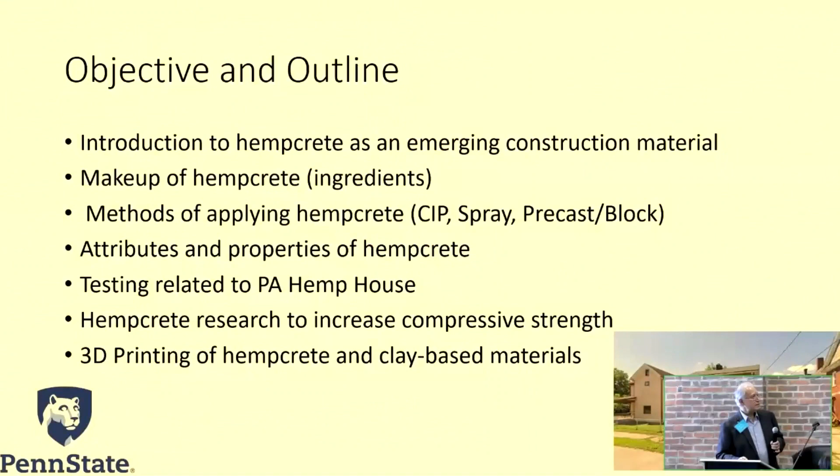So with that as the background, what are we going to discuss today? I should first apologize for some repetition because my colleagues already talked about the good stuff, so I'm going to skip through some of this quickly, since the presentation is for a crowd that my colleagues were not there for - so my stuff would be new, but they already talked about it.

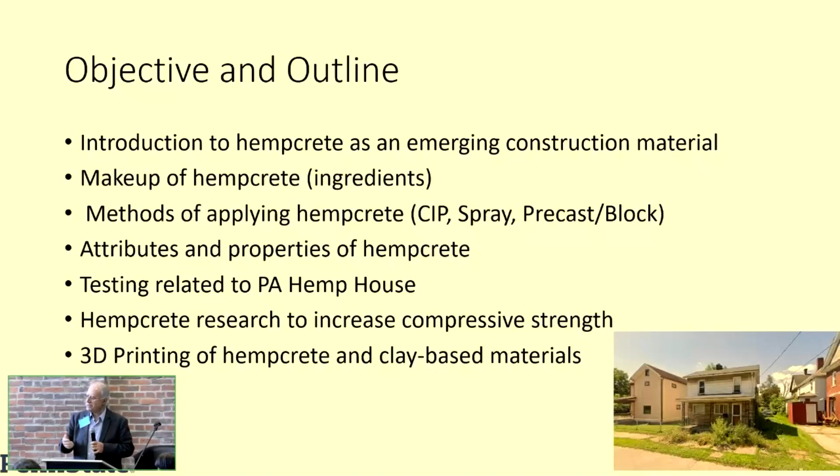Introducing hempcrete, what is the makeup, methods of applying hempcrete - they already talked about it, so I don't really have much to add. Attributes, some of the testing for the Pennsylvania Hemp House, hempcrete research to increase compressive strength, and then finding new areas - I'm trying to see, can we 3D print hempcrete? We've done some early study on that, and maybe combine it with other materials that probably my architect colleagues here would like to see.

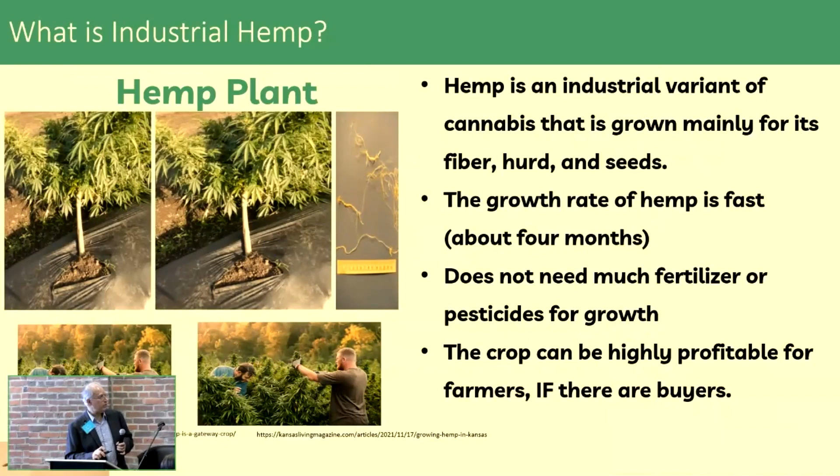So hemp, we've already talked about it, and I'm going to just skip through this since there's no need to repeat - you already have a lot of information today about growing hemp and what hemp is. The mixture, obviously, you have hemp hurd, maybe some fibers, lime, and water - that's your basic ingredients. Once you mix these and make your concrete, or hempcrete, or hemp lime, whatever they want to call it, it doesn't have much strength.

It's very, very weak - you can basically punch through it, your fist will go through it. But it has its own space, right? It's a good insulation. I'm trying to find what can make it a bit more stronger - what do we add? So that's the research. I have a student who's trying to figure out what ingredients, what additives can you add to make it stronger, get more PSI out of that.

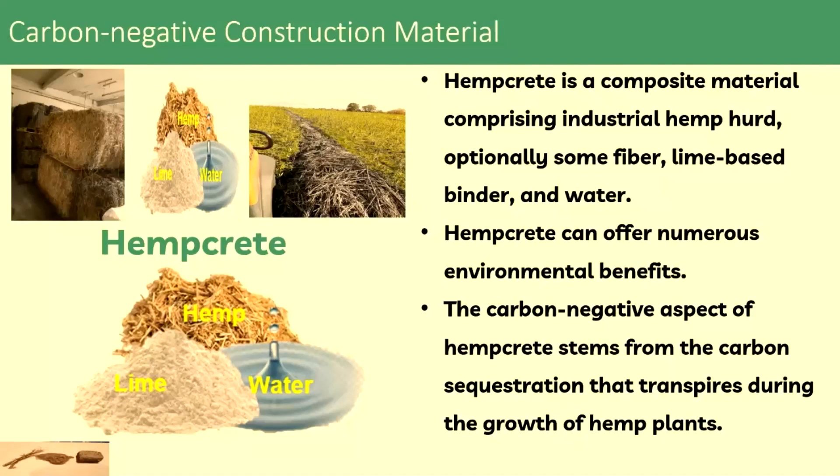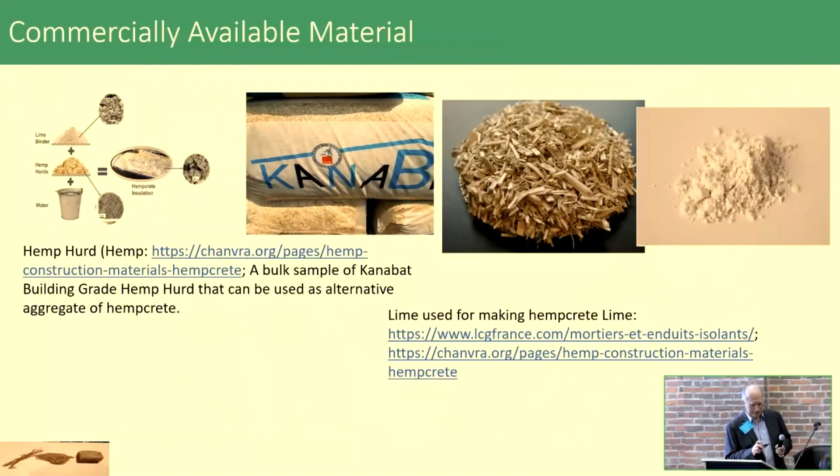So again, these are just the basic ingredients, and Cam has already shown you the French product - this is again Cam's operation. I apologize, it's repetitive, but you've already seen these.

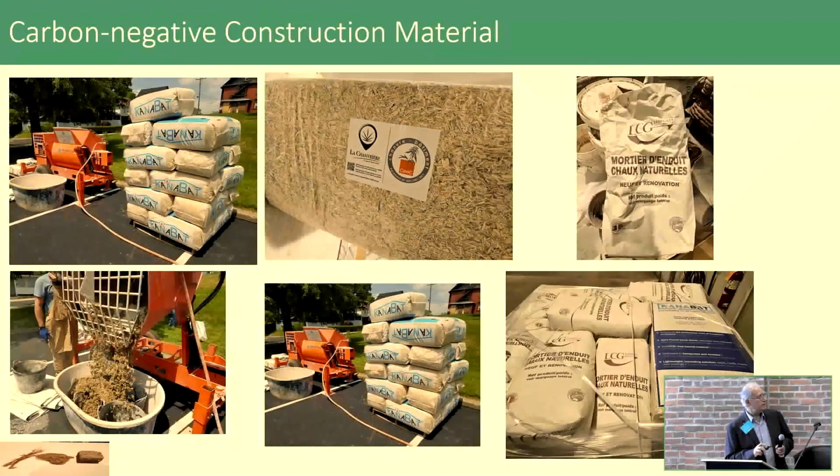So again, the 3 basic ways of building homes constructing with hempcrete: casting in place - you've got to have a little form, as Cam mentioned, and then you kind of tamp it, and then of course you move the forms up. You can have blocks, and of course the spray.

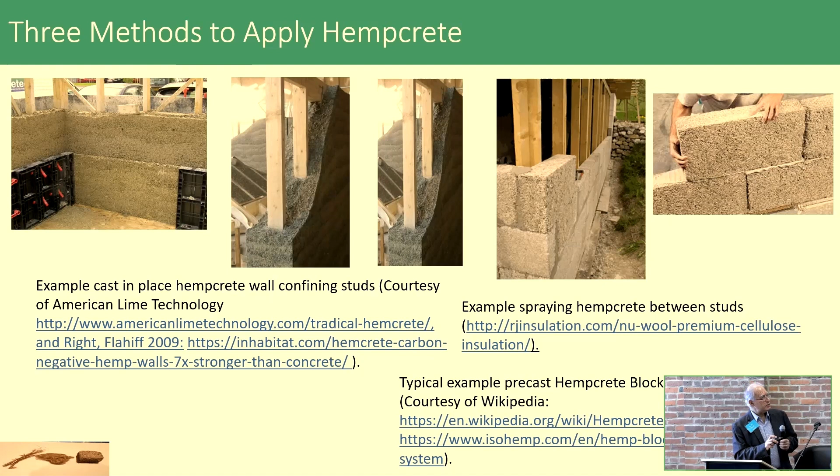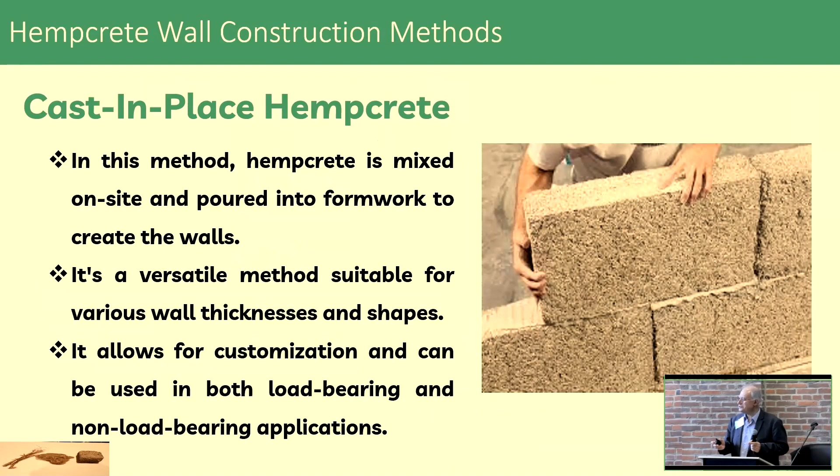So these are the attributes of how you actually build, just like regular block, but the masons in that case are not going to get backache - this stuff is pretty light. We have one sample over there, make sure you lift it and see how light it is. Spraying hempcrete, again, that's Cam's basically favorite approach of putting the wall up there like that.

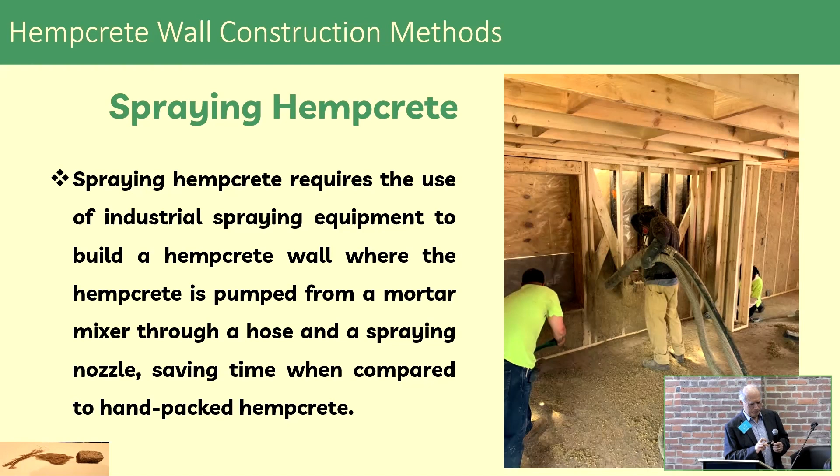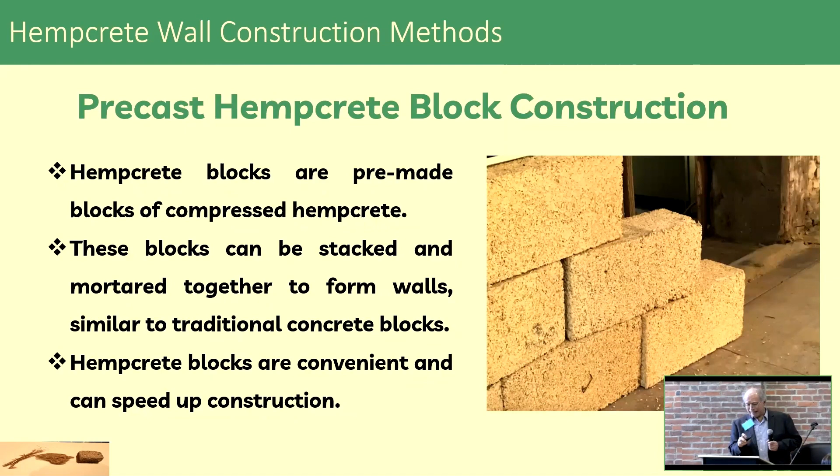And of course, precasting blocks. And then the next level, as Cam mentioned, is panels in his warehouse. So panelizing probably would be a better idea. One of the advantages of panelizing, again from our experience with the hemp house, is that it took so long to dry.

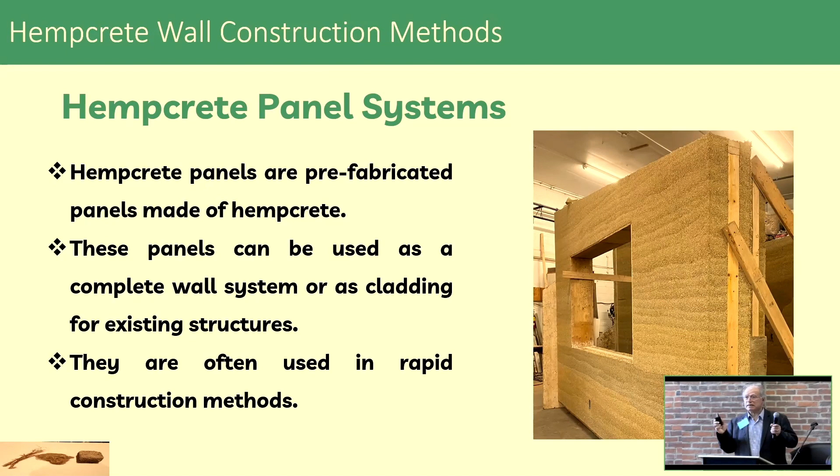So you can't put the finished coat on yet. That was the deterrent. The other thing is that it's a mess on the ground floor, and you have to spend a lot of time cleaning up. But with panels, this is clean, this is nice. You can control that, add whatever you want. This doesn't need any air barrier, but you can finish that as well. You can put the siding on the other side, finish the interior, and just send a complete package to the job site. This way you save a lot of the labor.

And then composite materials, maybe adding clay, straw, like an adobe, maybe combined with Hempcrete. We're investigating that for 3D printing. I'll show you in some slides toward the end.

So there are ideas that especially architects and designers can come up with. And if you think this has to be tested before you actually build something, that's where we come in. That's how I'm working with these guys.

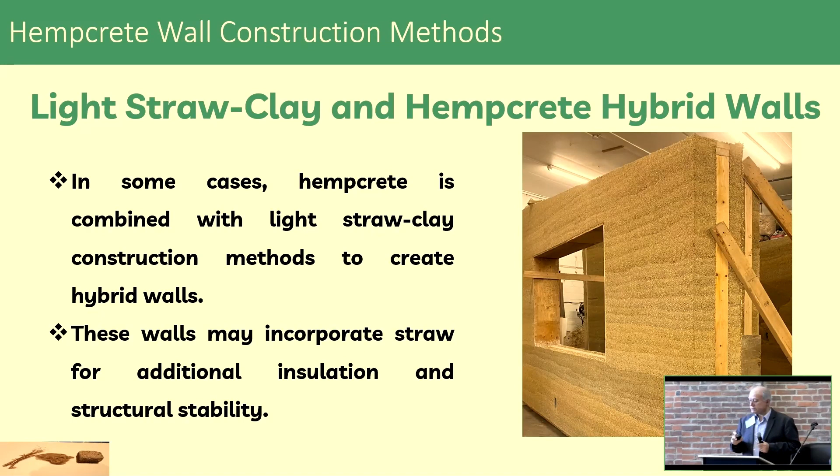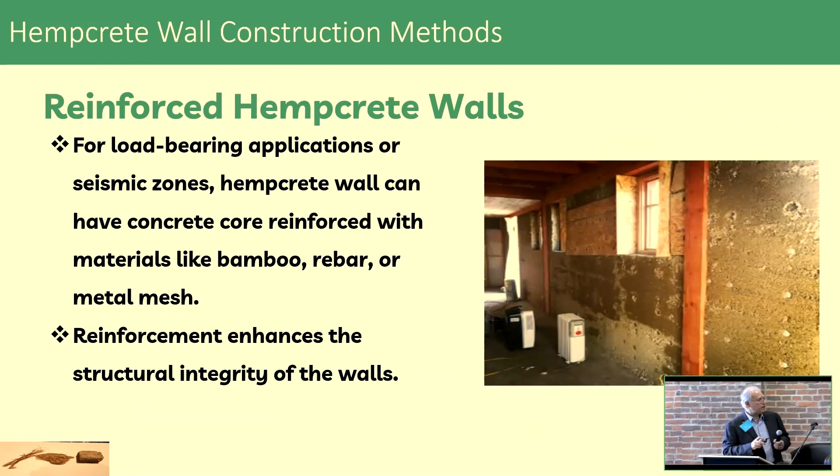And then what about reinforcement? Can we reinforce these walls? Different ideas, different mesh can be used. I had another slide but I think I'm missing it. Anyways, these graphics show you some comparisons.

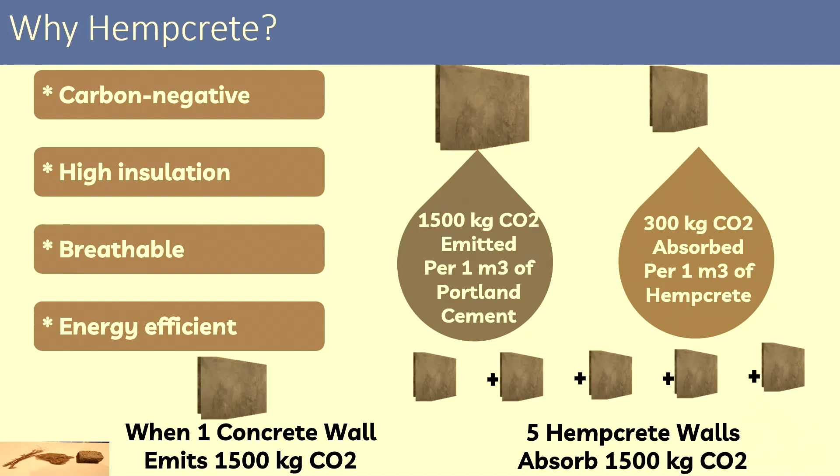Let's say you build a concrete wall, one concrete wall. One cubic meter of that concrete wall emits 1,500 kilograms of CO2. You get 5 of these walls made of hempcrete, and they actually absorb 1,500 kilograms of CO2. So that's how we can compare them as far as sustainability is concerned.

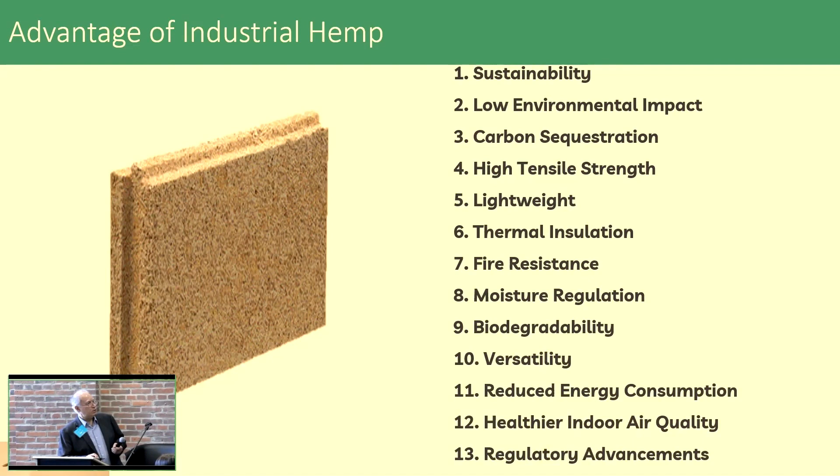But then there are a lot of other advantages with hempcrete, and there are numbers one can assign, but I didn't want to get into a lot of numbers here. For all of these, there are tests and studies that have been done. We're publishing papers assigning values to sustainability, low environmental impact, carbon sequestration, high tensile strength, lightweight,

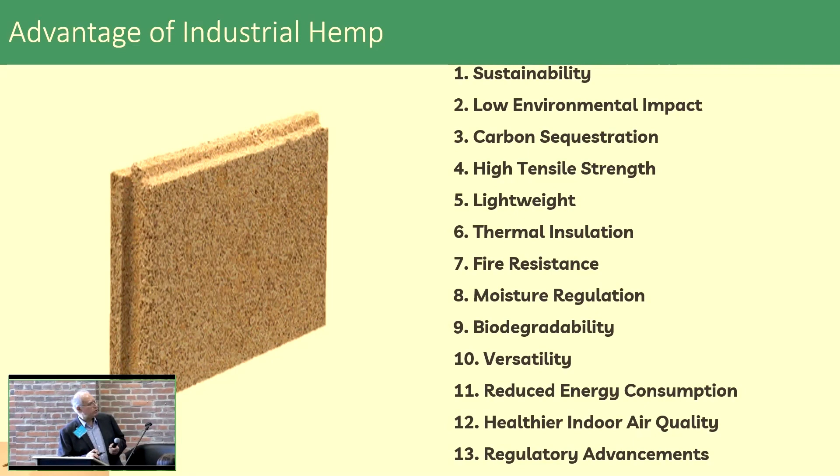thermal insulation, fire resistance - Cam mentioned fire resistance. I think I have one picture of what he was talking about. This basically shows that you can hold a flame on this material and it's not going to burn because of the lime.

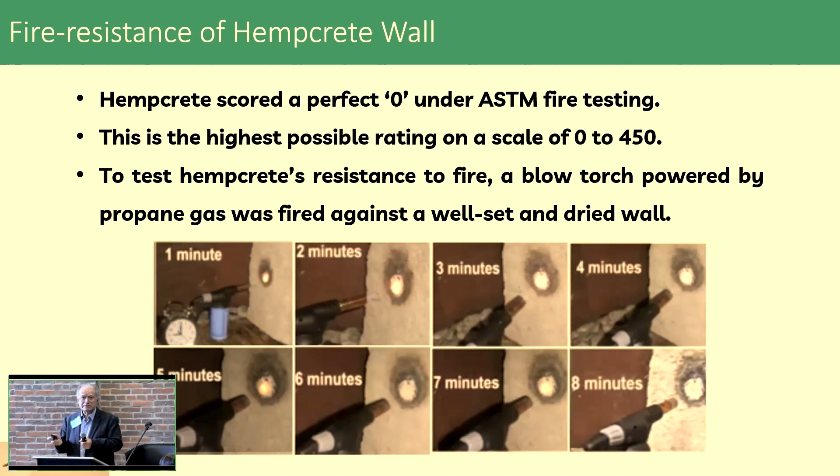So there's a lot of good properties this material has, but it needs to be developed further. Architects especially need to start using that, like a showcase, maybe demo houses. I think that's the key. If you have demo houses in different parts and bring clients - maybe you talk about Toll Brothers - if you build one demo house and bring Toll Brothers, they say, well, we like that idea. Then the makeup can be different. Again, that's part of the architect's design, or however you want to design the detail, that's fine.

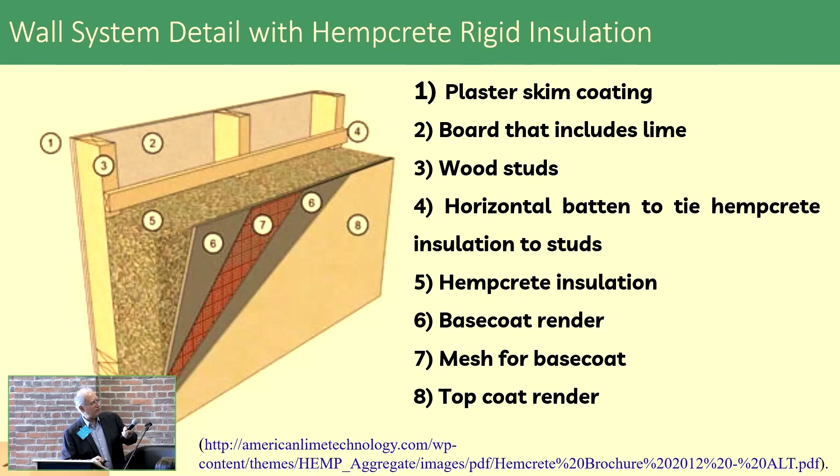At this stage, you're just saying it's like a rigid insulation on the interior side, between the siding and your studs, but you can have it between studs as we saw in the other pictures.

And just a few slides on the Pennsylvania Hemp House. Again, I had the pleasure of working with this team here. It's a magnificent team, very unique, very talented. They did the design, they did the construction. Our job was to study and measure.

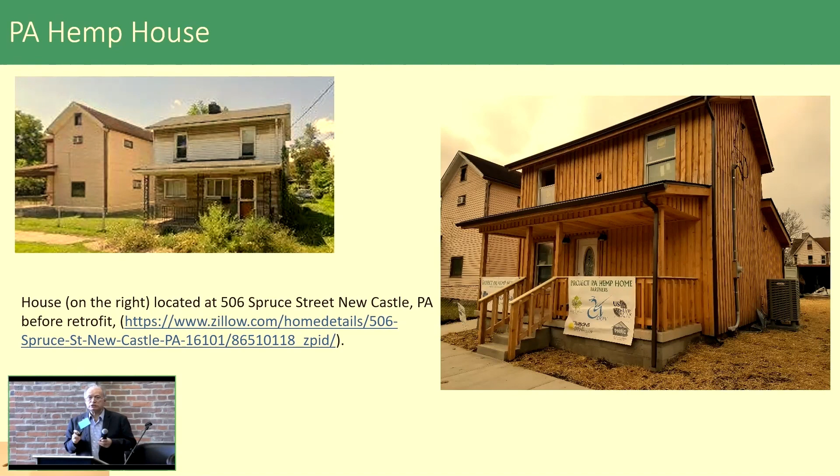And there was some interest about the question of the R factor - what is the R value for this? If you have an R value for, let's say, an inch of hempcrete, when you actually build that you can't say, well, I have 10 inches, so my R value is 10 times what I have for 1 inch, because you have siding, interior, exterior. So the best way would be to actually measure - once you're finished with construction, instrument it and measure the actual R value. That's what we did in our study. These are just different details that our architect colleagues developed for this.

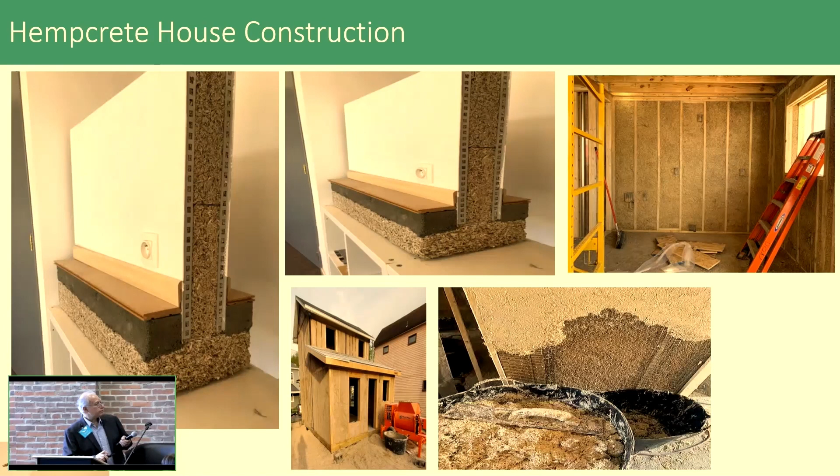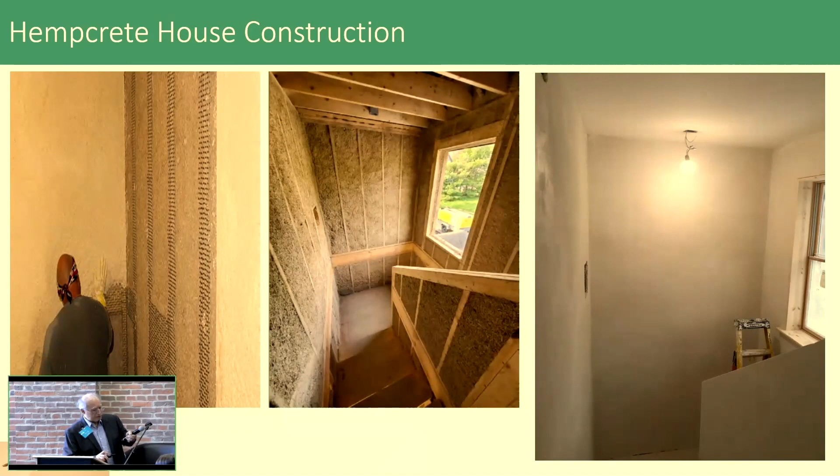So for this wall of the house, we came up with R17. Now if you start doing calculations, you can get something close to that. We have models we can calculate per inch, and then you have the air gap, the siding, the coat finish. But at the end of the day, can you prove that? We say, okay, this is the proof. We can set up instruments and basically get the reading from them.

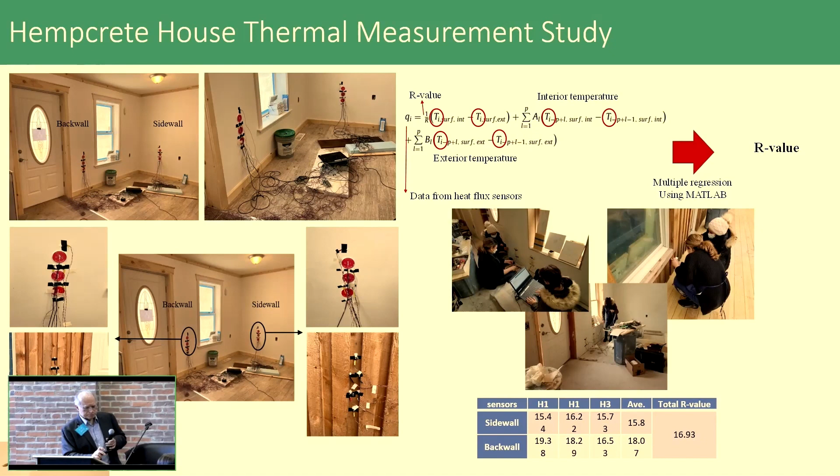So for this wall, which consists of 3/4 of an inch of rich plaster, like a double lime, on the interior, 10 inches of Hempcrete, 1/2 inch of airspace, and 1/2 inch of siding, that gives us an R value of 17.

Now, this is what it was created as. If you want to have a passive house and need much more than that, Cam has to thicken that wall, maybe go 12 inches of Hempcrete, then we reach whatever you need. And if you want it for the roof, that's fine too. Above the ceiling, instead of spray foam, you can have this Hempcrete.

So there are possibilities. The other part of our study was energy efficiency. We used BEopt, most of you are familiar with this program. We did a study and determined a 75% reduction in total energy usage between pre-retrofit and post-retrofit, meaning the initial house versus after it was retrofitted. That's a lot of energy savings.

Cam has already talked about the properties, the humidity, because this material can actually absorb humidity and release it. It's nice because the relative humidity was always less than 60%. You don't want the house to be too humid, it just absorbs it. So when you go to the house, maybe Lori can arrange for some visitors to go in.

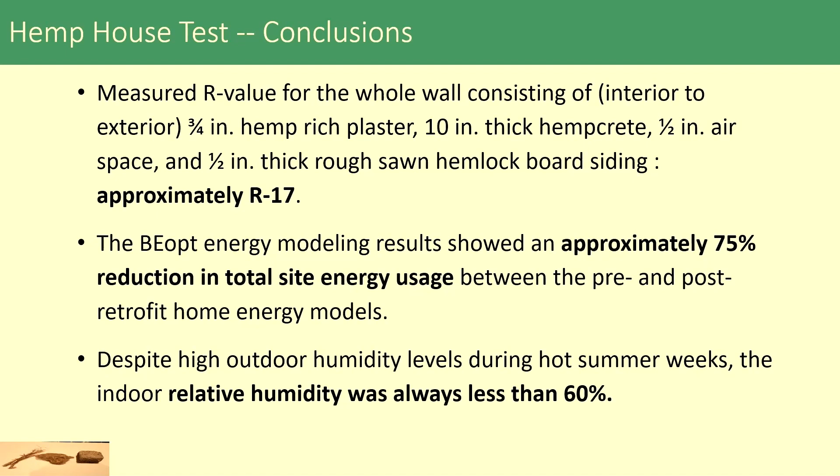So with that, I want to switch to the research side, because that's where I work with grad students. If they want to do a thesis, it's not what we just talked about, because that's Drew and Cam doing the job. But what about research? Well, research is, okay, you want to increase the compressive strength—we have to just do trial and error, because there's no formula.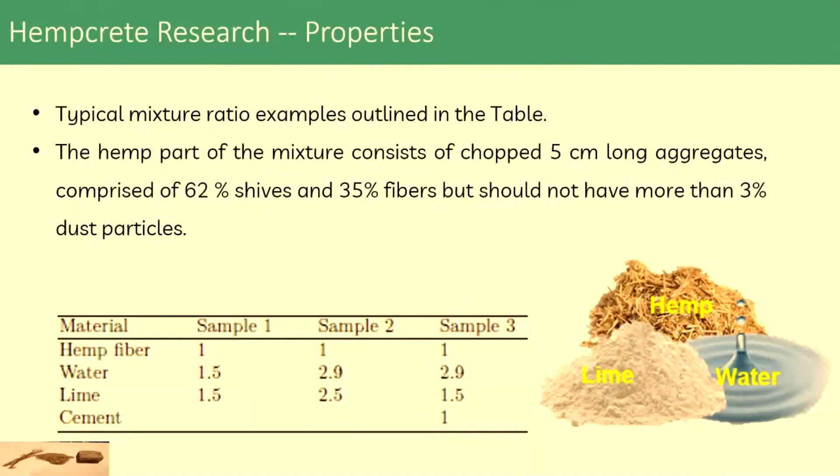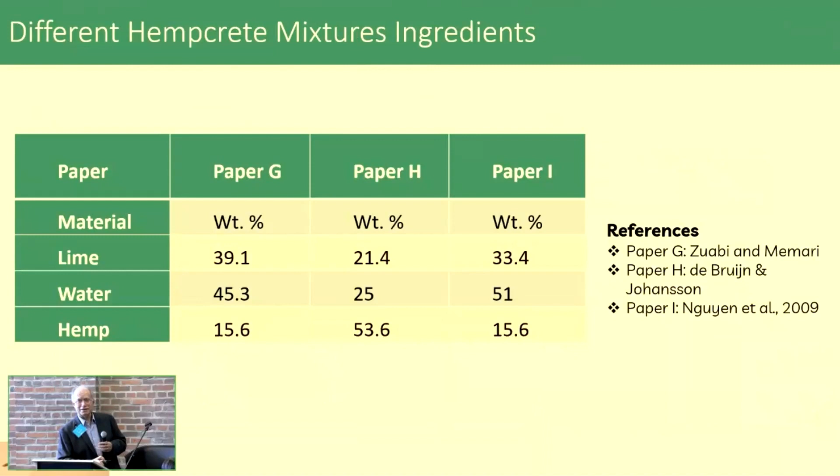We have to try different things, different additives, and just test and test and test until we find something that actually improves it. That's what defines research for a graduate student. We let them loose in the lab. I tell them, okay, you've got a lot of variables, work with them, come back and let's meet and see what we get. So we just do trial and error, different materials, different percentages, and test them to see what strength we get.

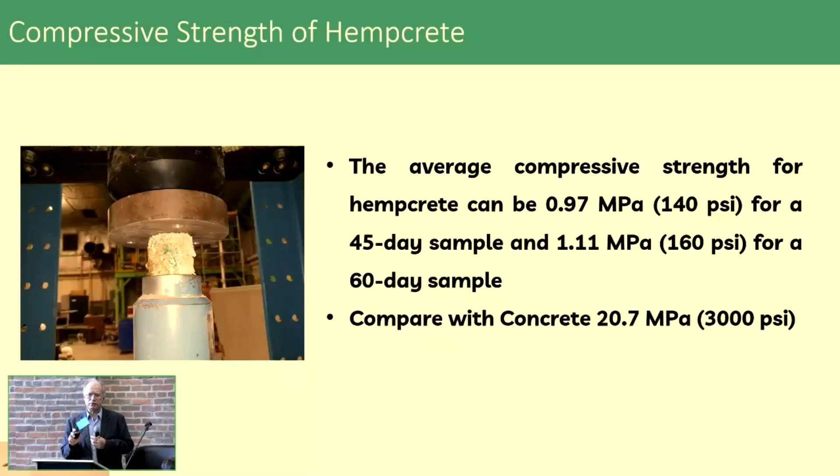But unfortunately, currently we don't have much, like 140 to 160 psi compressive strength. That's just nothing, so that's why we're not relying on this for load bearing. But Drew has a great interest in making his blocks stronger, so we're working together to identify, find maybe a secret recipe, some additives. I have a graduate student working on this specific question of what additives we can add to make this much stronger. I don't have results to share with you yet, but we're working on that.

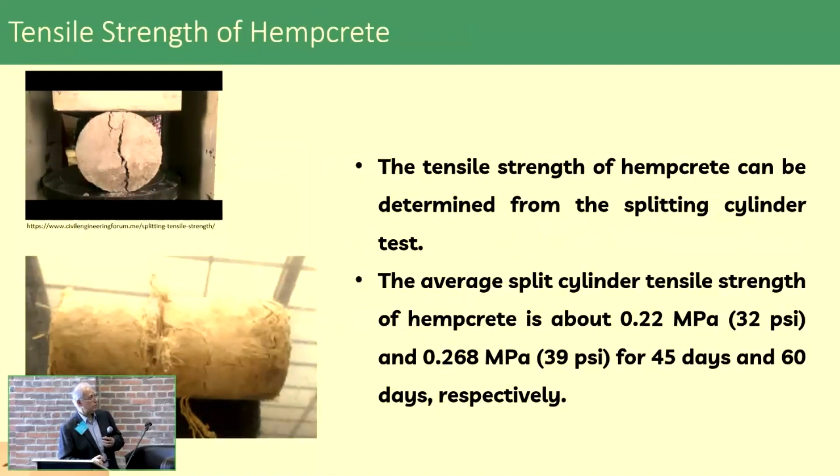Tensile strength of this, again, we go in the lab and it's very, very small, 32 psi. It's extremely small tensile strength, but that's what it is for now. And then super plasticizers, other additives—again, these are the favorite kind of task for a grad student, to go in the lab and change the percentages. There's nothing out there we can say, oh, that one actually works. We have to come up with that, and that defines the research.

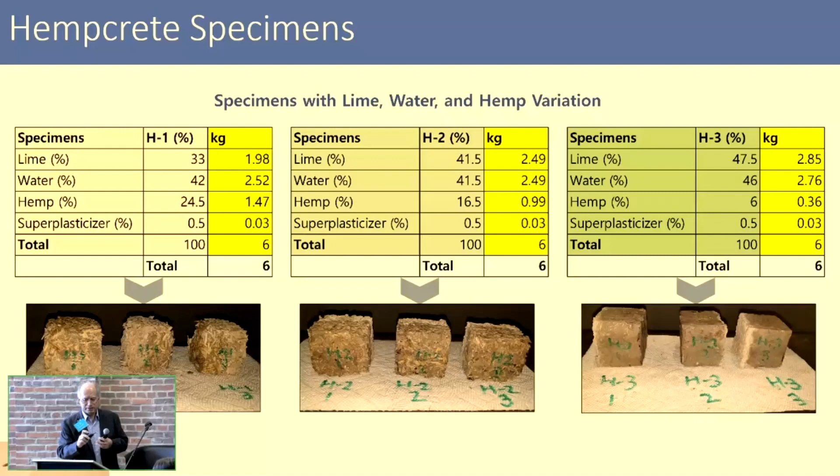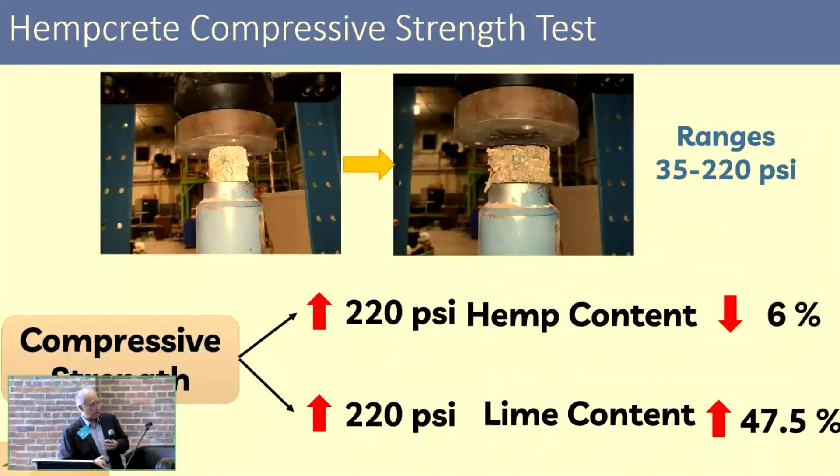Again, do testing further, and just identify what happens if you increase an ingredient or decrease an ingredient. Come up with some results that will show us the next step. So step by step, we kind of find the direction that improves the results.

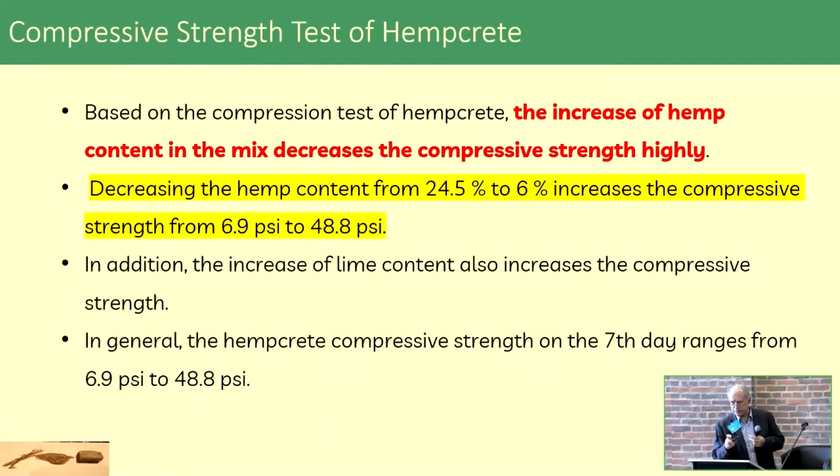At the end, increasing the hemp content is going to decrease the compressive strength, but increasing the binder is going to increase the compressive strength. There are different ways, and as I said, I don't have results to share because it's ongoing research at this time, but we have come up with some ingredients that definitely increase the compressive strength.

Now, moving further away from just basic research of strength, we want to see what other ideas we can use, like clay and hemp. What about Adobe? We use straw and clay, right? What about, instead of straw, using hemp and clay, and coming up with a new kind of Adobe?

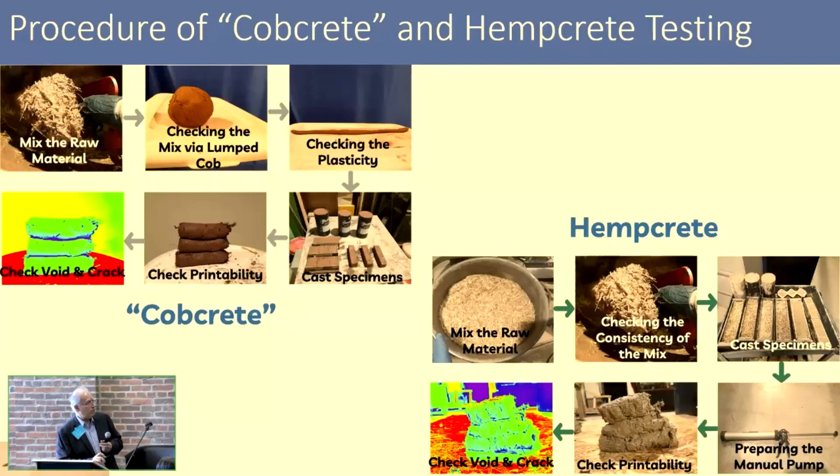So we've been testing that, and also exploring the possibility of 3D printing the clay mixture. We tried to 3D print Hempcrete. It was not successful, it was difficult. It would just get stuck in the hose, and the pump had difficulty giving us good results. But nonetheless, we're kind of exploring.

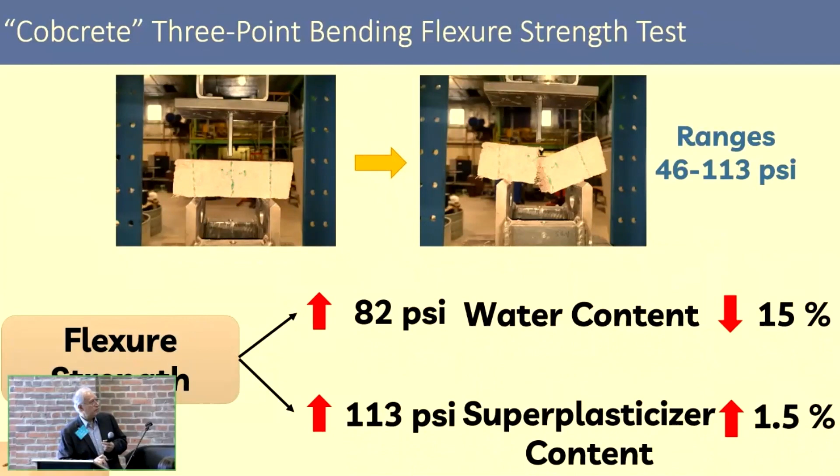We're testing. I have a PhD student, she's actually doing this work, getting basic information about the properties of the materials. But then there are architects who love to explore natural, sustainable materials like this.

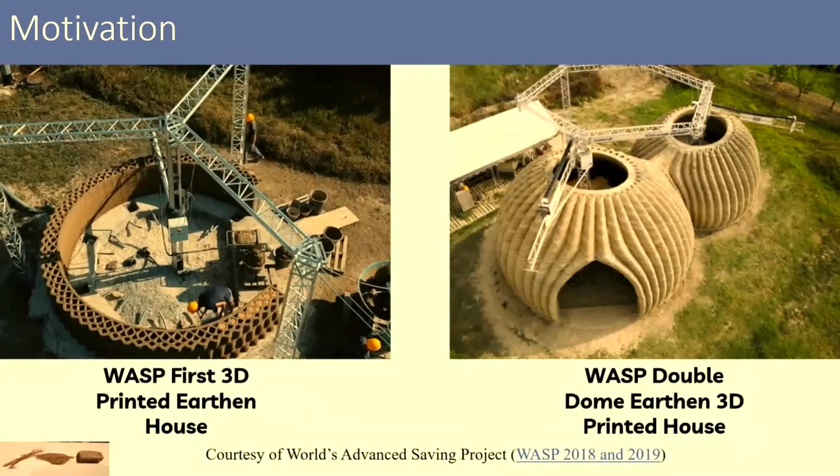Wasp is an Italian company that is promoting building with clay and straw and rice husk for insulation. And so we got some ideas from this company, and then my student is trying to work toward that goal.

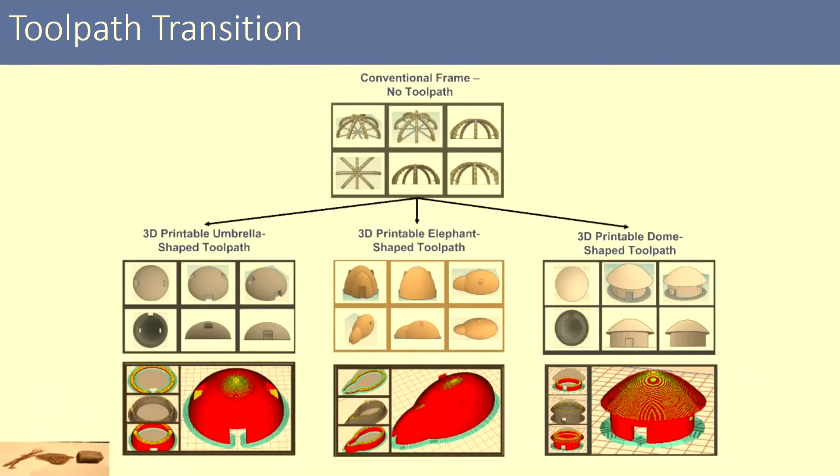And we're thinking about this thing with 3D printing: one of the advantages is that you don't have to have straight walls, you can have curves. This particular student is from Africa, and she has this heritage of this sort of rounded homes.

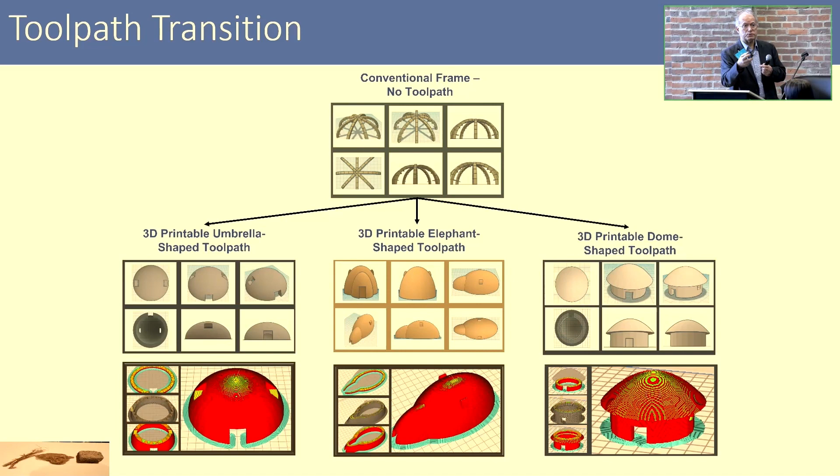And so we got these ideas that, well, if this is the traditional home, we can actually 3D print these things. And because we saw that Wasp is doing that, we could do that as well. So that was part of the motivation.

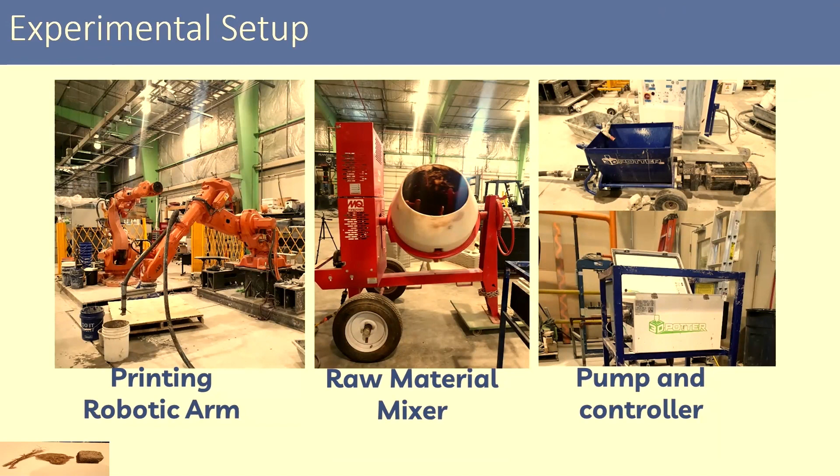This is our laboratory for 3D printing. You have the robotic arm, you have the mixer, you have the pump on the right side, and we developed a toolpath design that controls the movement of the robot.

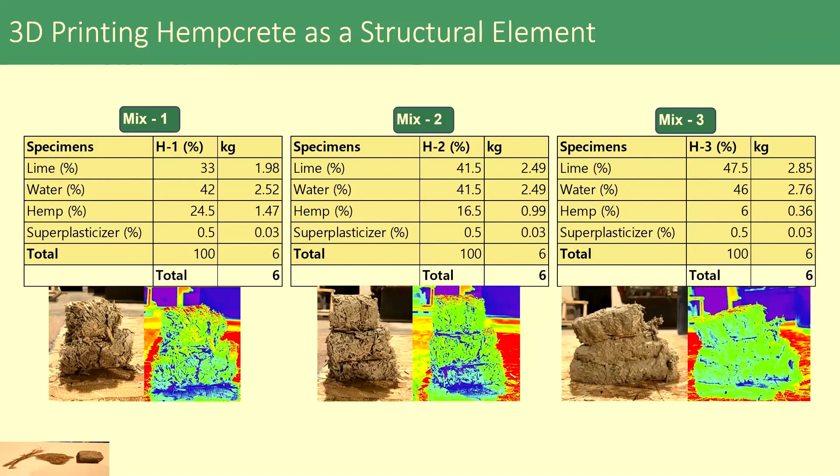So we said, okay, we go to plan B. Plan B is we're going to 3D print the clay mixed with hemp, but then fill all of those cells with Hempcrete. Now that becomes a good idea, because now you've got the insulation built in, and you've got the ability to actually 3D print.

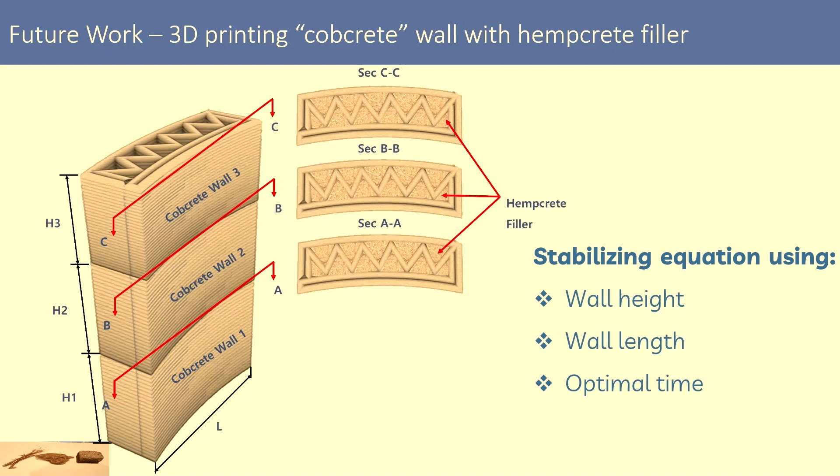So this was the final result of that approach. Here you see a 3D printed mixture of clay and hemp, and of course the cells will be filled with Hempcrete.

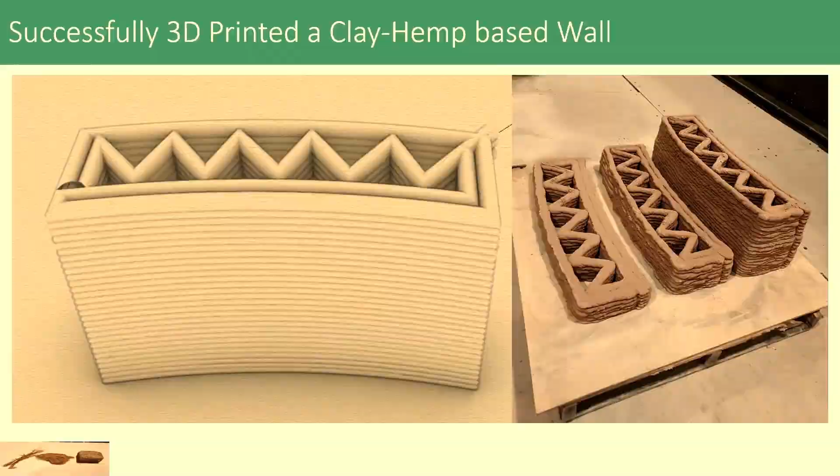So just to summarize this line of research, we try to investigate what we can do with Hempcrete as far as strengthening it, increasing its strength, maybe using it in a different environment. This is one of the approaches that we have seen.

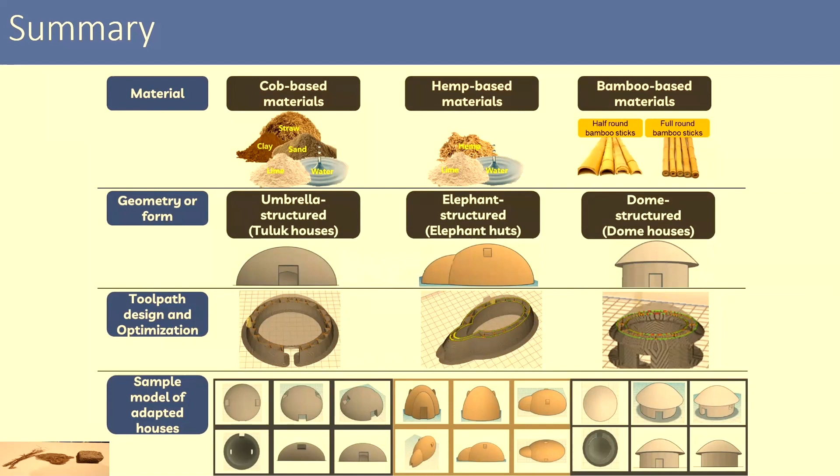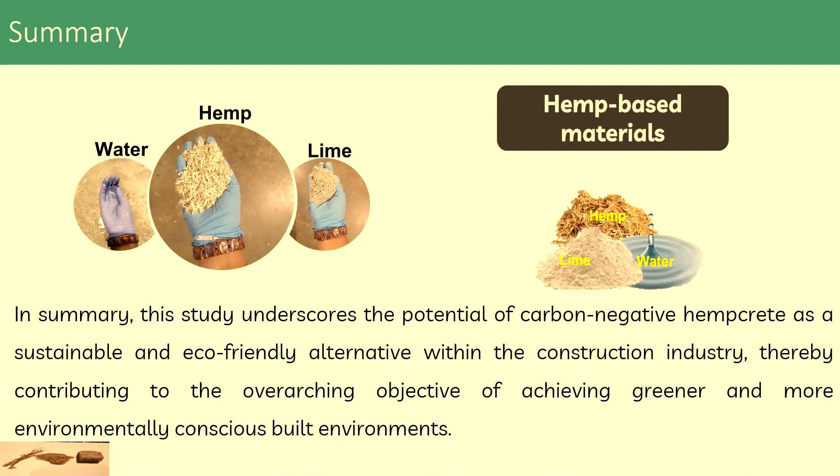So with that, we see that there's a future. We believe that there is a future for Hempcrete. It just has to find its own niche, especially with architects. Once they become familiar with this material and what you can do with it, then sky is the limit for you guys, you just take off with it. And we're looking for that moment when you guys come and say, well, we're going to build and design these homes, and we need a little bit of research. I'll be happy to help you at that point.

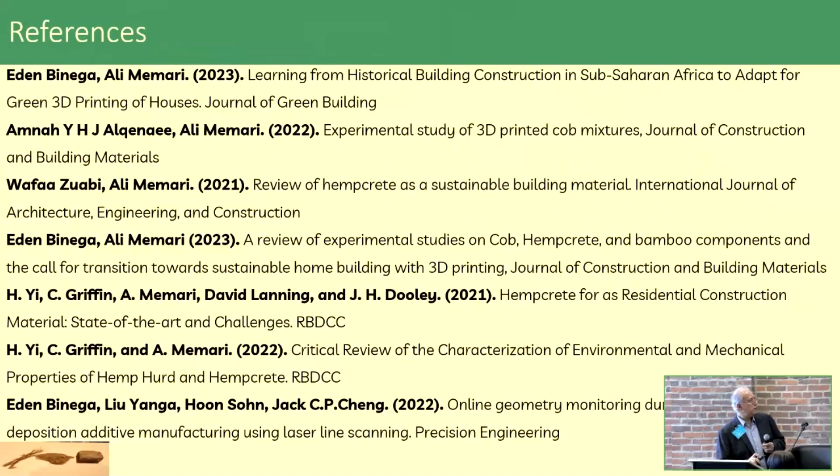So a lot of my students have been helping me, especially in this research: Eden Binega, Masa Hashimi, and Bahar Taibani. I'm going to just acknowledge their contribution. And with that, I'll be happy to answer any questions you may have.